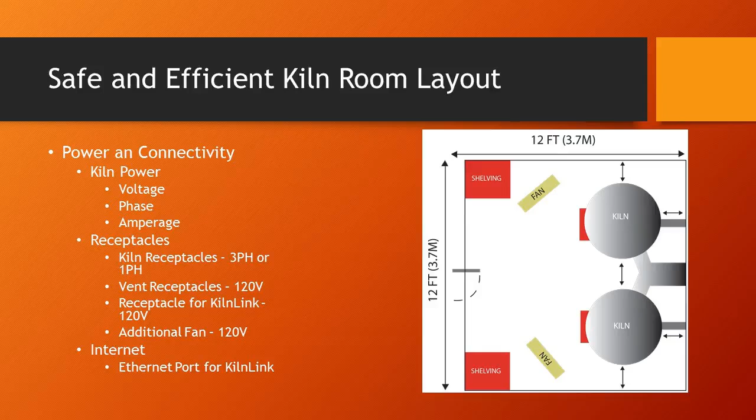Okay, so let's start with layout.

According to UL, and this is for most kilns, they need to be 18 inches from any wall. It can be any type of wall — doesn't have to be cement, can be just regular drywall. You want to be at least 18 inches from any traffic areas, storage cabinets, and 18 inches from another kiln. The reason for that is you don't want it radiating heat back onto the controller. So if you can, angle the touch pads away from each other, and that'll help keep some of the heat off the adjacent kilns.

I've seen people paint little yellow stripes to make sure people aren't doing things like setting boxes of newspaper right up against the kiln. The outside gets very hot, and if a piece of newspaper or something was set against the kiln, it could ignite. So you want to make sure you have good clearance from anything that can catch fire, especially if you have peepholes open.

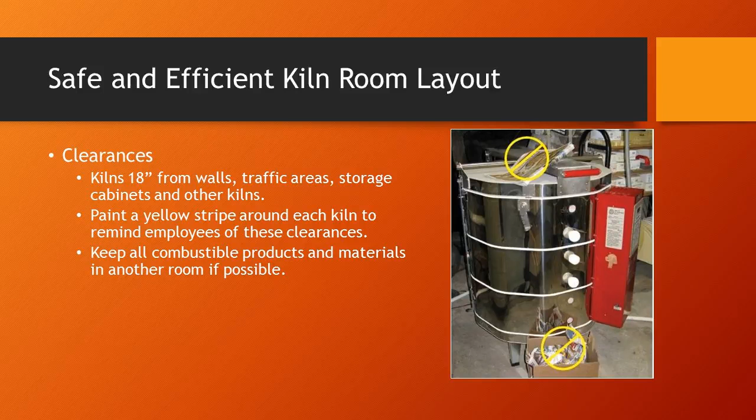Okay, next slide — floor covering. By Uniform Mechanical Code, it should be on tile, concrete, or some kind of masonry. A VCT tile — I see a lot of that in schools — that seems to be okay too. You definitely do not want it on carpet or wood flooring.

If you're in an old building with a wood floor, it's not the end of the world. You can go to Home Depot and get some of those 12-inch, 2-inch thick pavers, and make sure you make a platform that's at least 12 inches beyond the perimeter of the kiln, and then you'd be up to code.

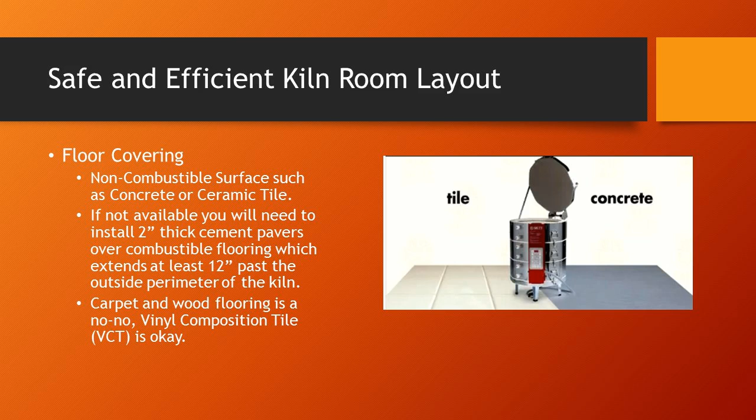Okay, so let's talk a little bit about vents. I mentioned that we have the EnviroVent 2. Different brand kilns have their own brand of downdraft vents. We worked with Orton about 30 years ago to develop this.

And the nice thing about these vents is it not only gets the fumes out of the room, but it actively gets them out of the kiln. And so what does that do? That, number one, gets all the fumes out of the room before they can enter it. And they've taken most of the nasty stuff out of glazes these days and clay bodies.

So really what you're dealing with mostly is carbon monoxide. And it's usually not enough to cause any serious damage, but it could give you a headache or something. So this actively gets it out of the kiln and pushes it out, vents it out just like your dryer would vent something out.

It also, since you're bringing more oxygen into the firing, if you have troubles with pinholing—and I know a lot of you are using commercial bisque, but let's say you get some bad bisque and you don't want to send it back because you're getting a ton of pinholing—you could refire that bisque and burn out all the carbon in it. What's happening is the carbon isn't getting out when it's fired in the factory, and then it comes out and causes pinholes in your glazes when you do your glaze firing.

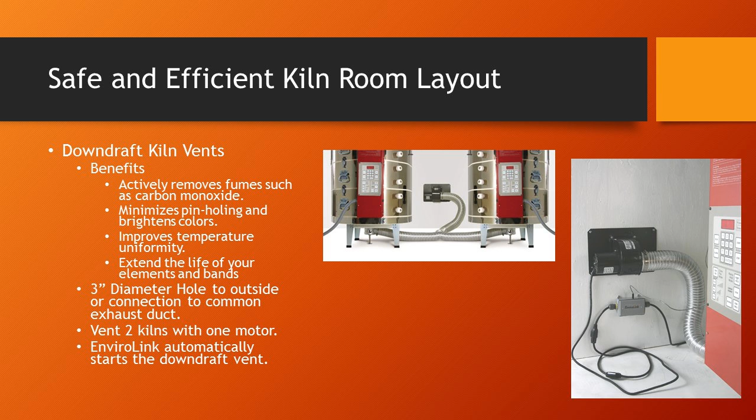Okay, so room ventilation is different than kiln ventilation. Although there are some overhead vents where you prop your lid and leave the peep plug out during the firing, and then you have to come back and lower your lid because the kiln won't get to temperature. So a lot of people use the downdraft and the updraft in combination, or the overhead.

The overhead is better at getting heat out of the room, but normally those decisions should be made by an HVAC guy. They're going to ask you, well, how much heat does this kiln put out? And they're going to look at the insulation in the room and the height of the ceiling, and then they can calculate how much air they have to move through that room. So you would give them the BTU rating, which you can find on our website.

Plan B, if you don't have AC in that room, you don't have an overhead vent, especially if you're in a cooler area, you can just kind of leave the door open, put some box fans in there. But the key is you want to keep the room below 100 degrees F.

If you don't, on our kilns you get an error code that says EBD, and that is telling you that the controller is getting too hot, and it's going to shut the kiln down to prevent it from overfiring. So if you do get that message, you've got to do something. Bring a fan in first—that's the cheapest solution—and just kind of blow it across the controller. That usually gets you there. If you're still having problems, give us a call, and we can walk you through some other options.

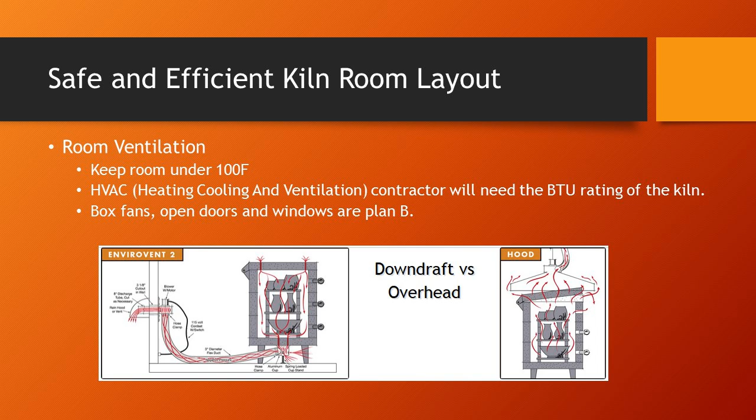All right, sprinklers—we have set off a few of these. The lowest rating head, see how these sprinklers work, is you usually have a head in there that's like a fuse, and I think the lowest one is like 130 degrees. If you have your lid propped and don't have any ventilation, and it's right above the kiln, it can set it off.

But you can go to your landlord and find out who the sprinkler contractor is, and a lot of times they can put a higher temperature head in there. I think it goes up to 300 and something degrees. So if you're a little worried about it, fire up the kiln and tape a cheap thermometer next to it and monitor it to make sure you're not getting close. I think it's a red fuse in there that's the lowest one, and you can pull down off the internet what the color coding is.

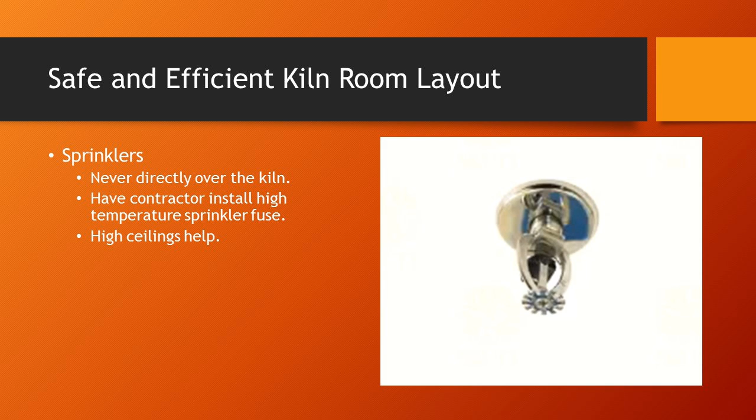The higher the ceiling, obviously the more distance you have from the kiln, the more help it is. For rack storage, when you're locating the kilns, make sure you're not making your employees squeeze by these things to get the stuff they need. They do get really hot—they will burn your skin, especially if you have a peep plug out and it's firing, since that's more of a flame, so it's a little more dangerous. Make sure they have adequate room to get to what they need.

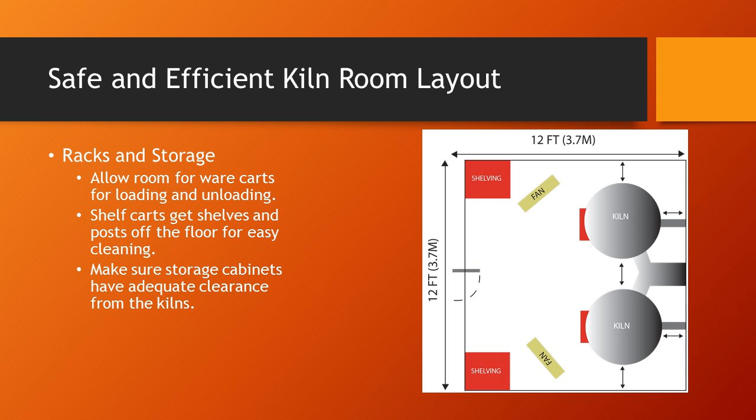It's nice to have room for your carts so you can load the kilns. A lot of people buy little shelf carts so they get the shelves off the floor and can move them around if they need to. Make sure your storage cabinets have adequate distance from the kilns. I've had some art teachers who had their crayons stored right above their kilns, and they all melted—so that's something you want to be aware of.

All right, well let's talk about kiln loading now. Kiln loading is one of the most underrated or untalked about ways of improving the performance of your kiln, and there are certain secrets to get more efficiency out of loading your kiln.

One thing that would behoove you to do is spend some time with the people loading your kiln and teach them how to load the shelves properly, so they don't bang into the side and break the brick out, or lean in and rest their hand on the top brick and break it out. These things can look pretty ugly after a while if you just give employees free rein and they're not taking ownership of it.

There are certain tricks to get more in each load. A lot of times what people do when loading a kiln is they're afraid they're not going to get as much in as they want, so they load it really heavy in the bottom and light in the top and middle, or vice versa. They realize they're not going to get enough in, and then they pack it really dense in the top. I got a little ahead of myself—we'll talk about that more on the next slide.

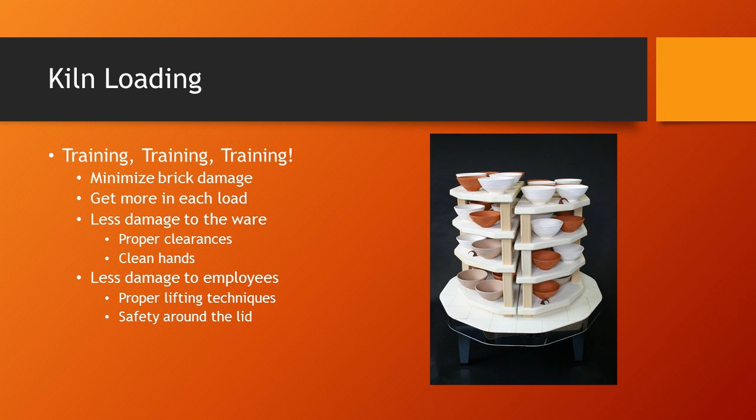Another thing to be really sensitive about is those lids, especially if you have an older kiln without a lid lifter. If you let the maintenance go on your lid brace or something and they bump it with their elbow, that could be 100 pounds coming down on their head, so be careful with that.

Okay, so prior to loading, check out your shelves. Make sure you don't have any bare spots on your kiln wash—if you do, either patch them up or clean them all off and start with a fresh coat. If you're using stilts, make sure the points aren't laid down and the pieces will sit real stable on there, and make sure your element grooves are free of debris.

If you notice that a little piece of brick or a piece of glaze is sitting on that element, get it off there before you fire the kiln, because that could burn right through the element and then you've got a kiln down.

Check the thermocouple for cracks and excessive wear. You can see in that top picture there, the one on the right is on its way out, but we'll tell you how to know when it's time to change your thermocouple in a little bit here. I'm going to show you some kiln logs later on.

Check your kiln log if you need to make any adjustments. If you've got an element that's a little dicey on the bottom, you might want to load it a little lighter than normal. Also check if you had any error codes, or if your firing times are getting extra long, especially if you're writing your own programs.

Heat work is time and temperature. So if it's taking a long time to fire, it means the kiln is struggling to reach temperature. You could overfire the pieces if you're using the ramp and hold program of your firing. Usually contemporary studios are just using that for glass.

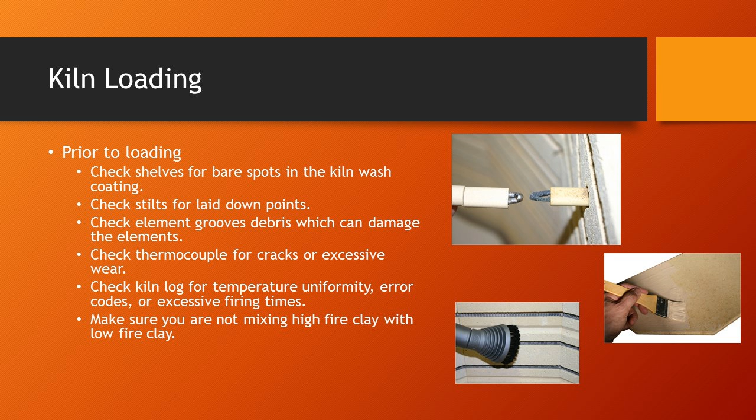Hopefully you're using cone fire mode or whatever your brand's version of that is every time. It's the most fail-safe thing you can do. Also, some companies are starting to get into high fire clay. Make real sure that you don't have any low fire clay if you're firing high fire clay, because it will completely melt down. I've seen plenty of ruined kilns where a whole load just got melted down. So we'll talk a little bit about how you can prevent that also.

Okay, so clearances: you want at least 1 inch from the bottom, so you're posting up with a 1-inch post from the bottom. That's because you want heat flowing under the slab or under the bottom shelf.

You want to keep ware at least 1 inch from the elements, so after they load it, get them in the practice of looking down around the kiln and make sure something didn't, like a little bowl, get cantilevered so it's just sitting right up against an element. If you get it too close to the element, it can burn out a glaze, or worst case scenario, if it's touching the element, it will burn out the element.

Keep ware at least 2 inches from the lid. As you can see in the picture here, somebody didn't do that. A lot of people think that if you look across and everything looks good, you can't see it rising above the kiln, then it's fine. The problem is when the lid heats up, it actually becomes a little convex because it's expanding more inside the kiln than it is outside because of the heat, and it'll actually drop down and pick up pots sometimes.

So 2 inches is a good rule, try to stay at least 1 inch. And then allow enough room between shelves. If you're doing a lot of tile, there are certain brands that don't have as many element grooves as others. If you do, let's say, a 2-inch post on a shelf, it's possible not to have an element radiating between that layer, and so things would likely be underfired.

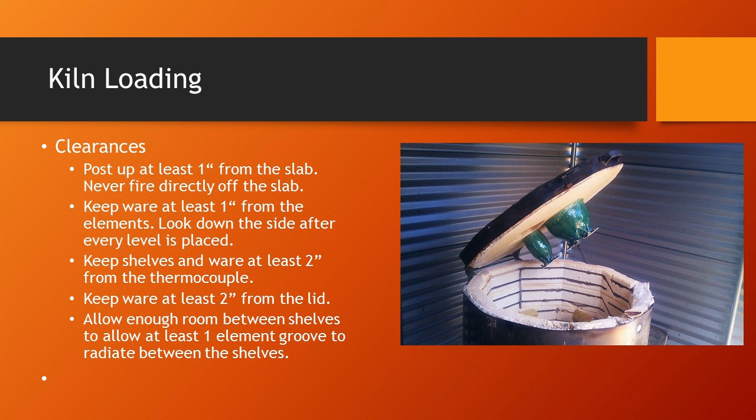Okay, density of the load. This is what I was getting at earlier. The more ware you have in a particular portion of the kiln, the slower it's going to fire, because it's going to take longer to absorb that heat work.

So the coolest places in your kiln are the bottom and the top. Generally you want to load it a little lighter on the bottom, average in the middle, and then maybe a little lighter on top. That'll give you good heat uniformity.

If you have a small load, get it up near the thermocouple. If you put it all on the bottom, likely it will underfire, because the kiln will think it's done and the ware won't be ready yet.

So a little trick to loading your kiln efficiently, if you look at that bottom right-hand picture, is to go ahead and cut out pieces of cardboard that match the size of your shelves and put those on your racks. Then when you have a piece of cardboard filled up, you know you have a full shelf.

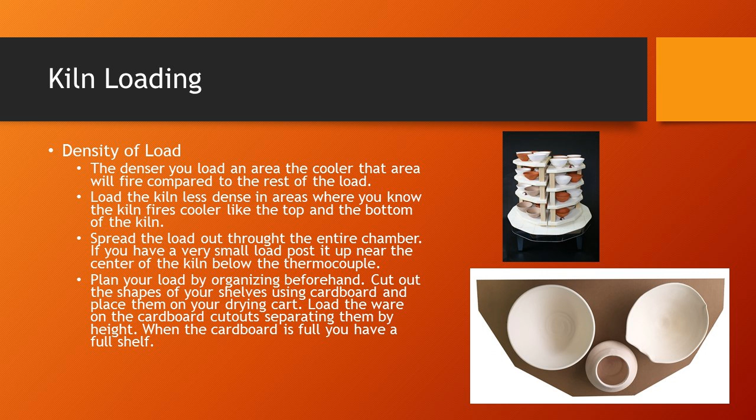Another thing you might want to do is on different shelves of the rack, put varying size kiln posts and arrange pieces by height. For example, if you have a tall vase next to a shallow bowl, everything above that bowl is just wasted space. So you can really pack it in tight but still get good heat uniformity if you use this method of cutting out shelves or shapes of shelves and putting them on your drying racks.

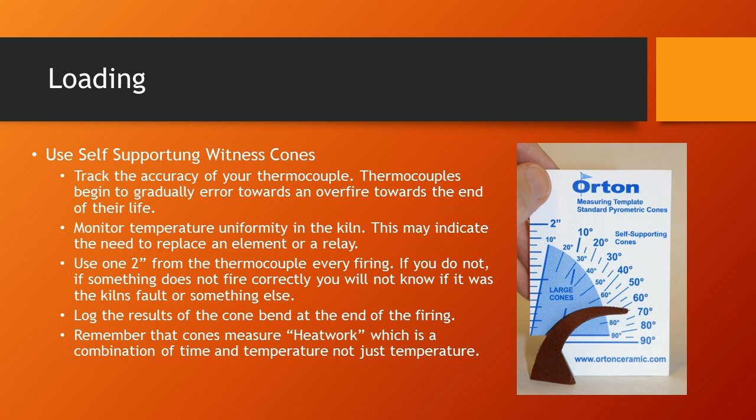And if you're doing something unique, for example, if you're trying to slow cool cone 6 glazes or do crystal glaze firing and you have to write your own programs, do a test fire first with cones and make sure that the ending temperature you're picking is going to give you the adequate heat work. When you do cone fire mode, it automatically adjusts that temperature up and down for you to get the right heat work.

Okay, so programming. There are 2 most common ways of ruining your kiln. One, putting in the wrong cone value. So many times, if you don't train your employees correctly, they hear 'oh, I need 6' and you're firing to 06. If you have earthenware clay in there, it is all going to melt to the bottom of your kiln and probably ruin it. We have a new feature that I'll talk about in a little bit that would prevent them from doing that if all you're doing is low firings.

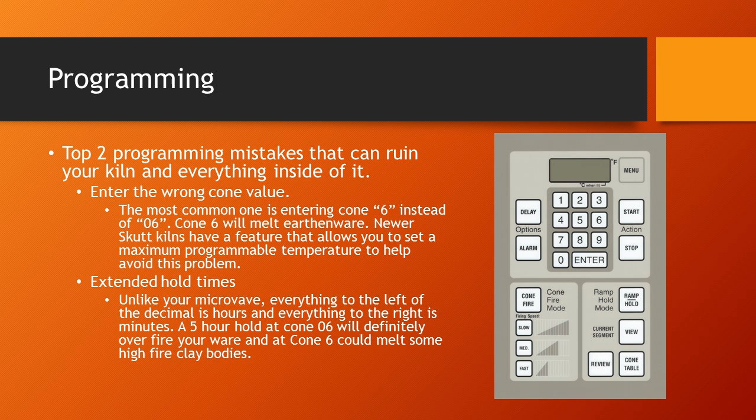Another thing is extended hold time. We always recommend that you put like a 5-minute hold on the end of your cone fire mode - that's holding at peak temperature, which allows the kiln time for heavier loaded areas to kind of catch up with the rest of the kiln and all the glazes to flow evenly. But on your microwave, everything to the left of the decimal is minutes and everything to the right is seconds. That could be the mindset of your employee. And if you put 5.00, that would be a 5-hour hold, which is definitely going to cause some problems. So build that into your training.

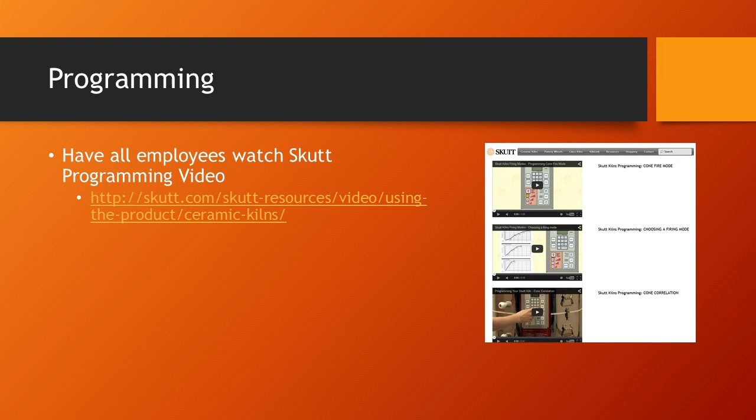We have a ton of videos in our resource section - I'll show you that a little bit. So I would have all your employees just watch the cone fire mode at the very minimum. When you order a new kiln, it comes with a DVD that has every video we have, or you can just log on our website at www.skutt.com, and then you can find the video that you want to learn about.

Okay, so managing maintenance and repairs.

So when you unload the kiln, it's nice to have a kiln firing log. I just uploaded some of these to our website, and I'll show you how to get to them.

When you're unloading the kiln, you want to see how the cones look. Make note of that, how the ware looked on each level. There's some information the kiln gives you at the end of the firing, and you want to write down how long the firing took. If your firing times keep increasing, it may be an indication you're going to have to replace your elements soon. What number firing was this?

Our newer controllers actually keep track of how many firings you have, so that way you could say, okay, well I changed my elements on firing number 100. I know they're usually good for 300 firings, so I'm going to make a little note on firing 400 that I want to take a look at these elements and see if they're ready to replace.

Or just at least when you're getting into a busy season like Mother's Day or Christmas, you can say, holy cow, I might need to do an element replacement or a relay replacement during this period. I'm going to go ahead and take care of that beforehand.

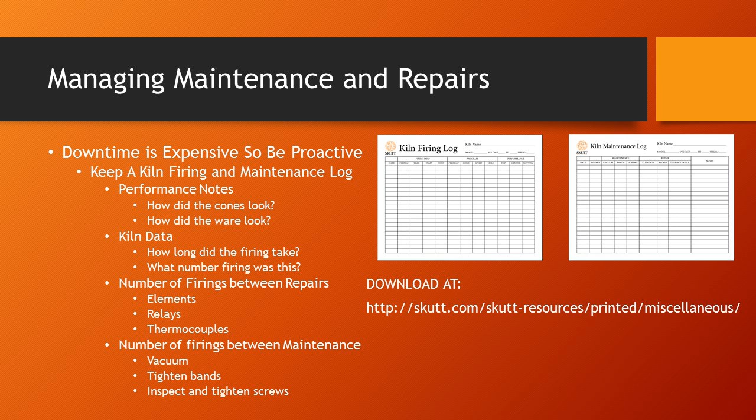Tightening your bands, inspecting the screws like the one that holds that lid brace, holding the lid above your employees' heads. So I would suggest you download those two, and I'll show you where to get those.

One of the best things you can do is find a good repair person. There's a few not-so-good repair people out there. I've seen kilns where they've gone in and got parts from Home Depot that were the wrong gauge and weren't high temperature wire. Not only are you going to have to pay for that repair twice, but it can also be a fire hazard if they don't know what they're doing.

So I would talk to your local distributor. They probably know who the good ones and the bad ones are. Sometimes paying a little more is worth it.

And make sure the ones that you pick are using only OEM parts. There's a lot of aftermarket elements where they can save a little bit of money on the internet, and they might not necessarily be balanced correctly. We balance our elements, putting hotter ones on the top and the bottom and cooler ones in the center. So make sure they come in Skutt packages.

Like I said, you want to schedule these repairs before your busy season. And then try to do all the repairs at once, so you're not constantly paying for additional service charges and having a guy come in and bringing a kiln down for a whole day or a whole week sometimes while they wait for parts.

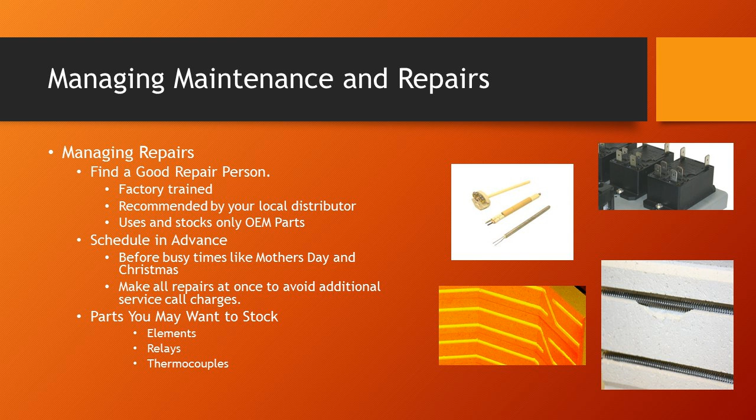Okay, I'm running out of time here, I'll try to get through this real quick. Something you should absolutely learn how to do yourself, you could save a lot of money, a lot of downtime: replace thermocouples. It takes like 5 minutes and it is so easy to do. We have a video that shows you how to do that, and I'll show you where that is.

Vacuum out your kilns on a regular basis. Vacuuming out your kilns will extend your element life tremendously. And make sure you keep your bands tight, they loosen up over time as the kiln expands and contracts. Again, we have videos on all this stuff.

Things that would be helpful to know is how to replace a relay. When you have a relay down, you have a kiln down. If you know how to replace a relay, or you have someone trained in your business that does, then you can save a lot of downtime and a lot of money.

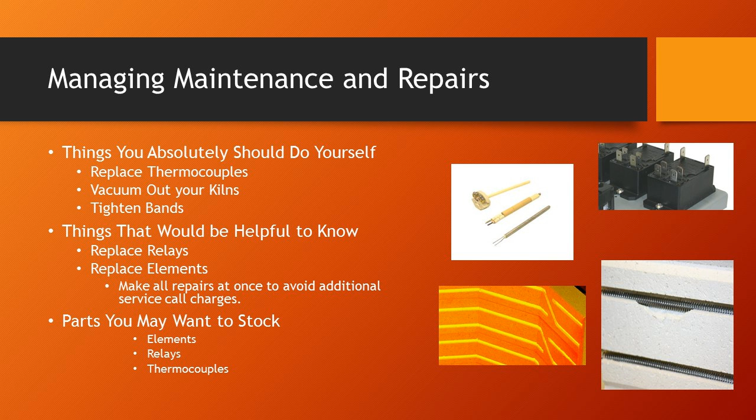And replacing elements usually takes a long time. It's not something people normally want to do, but if you're really handy and thrifty, replacing your elements can also save you a lot of money. Parts you want to stock: elements, relays, and thermocouples.

All right, here's the top 10 things that will make your kilns last longer.

Train your employees so they're not beating up your kilns. Vacuum out your kilns, especially your element grooves, to get all that dust and little bits that can collect on top, because it makes them fire hotter. You can double the life of your elements if you do this on a regular basis, maybe every 30 days.

Tighten your bands, keep your elements in their grooves. If you look at that picture on the top left, if you bust out a bit of brick, that element turns into the consistency of spaghetti, especially if you're high firing, and it's going to want to droop out of there. If you do bust a brick out, you can build a little fence using element pins, not paper clips. It's got to be the same metal as the element, otherwise it'll just burn out the element. So you build a little fence, and then when it's time to replace elements, you might want to replace that brick at the same time.

Use only qualified kiln repair people.

Now, a lot of people are getting into stoneware. One thing you need to know going into it is you might want to raise your prices a little bit, because, for example, if you were firing to cone 6 or cone 10, you might get 60 to 100 firings on a set of elements. If you're strictly low fire, 300 to 500 firings on a set of elements. So you may have more expense if you go into high fire.

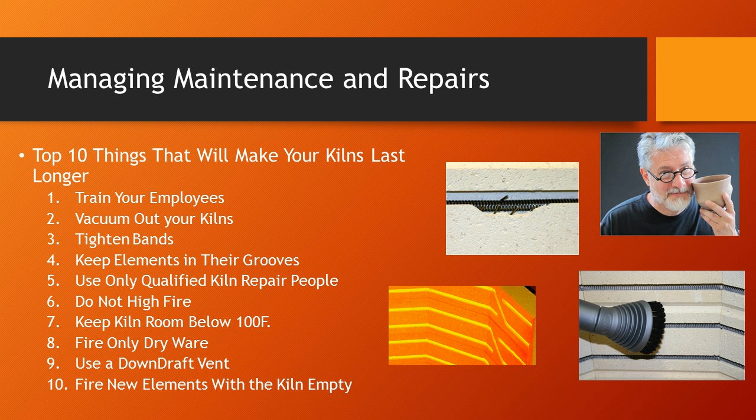Use a downdraft vent, we talked about that. And then if you put in a new set of elements, do an empty firing, because all of the stuff that comes out of the glazes on your first firing will damage the initial coating that you get on your elements. That's an oxidation coating, and that's going to protect your elements throughout the life of the kiln. So if you don't get a good one because it got interrupted by some gases coming off of your glazes, then they're just not going to last as long.

Finally, some new products, tools for you to use. KilnLink - I don't have a whole lot of time to give it the justice that it deserves, but it logs all your firings. It's kind of like automatically doing a log for you, so you don't have to keep a firing log.

Let me go up one. It graphs all your firings. You can see what temperature each kiln you're firing is at any point in time from your smartphone or your laptop. It'll give you alerts when the kiln's ready to unload, so you're efficient at telling people to unload that kiln and reload it. It's got a lot of benefits.